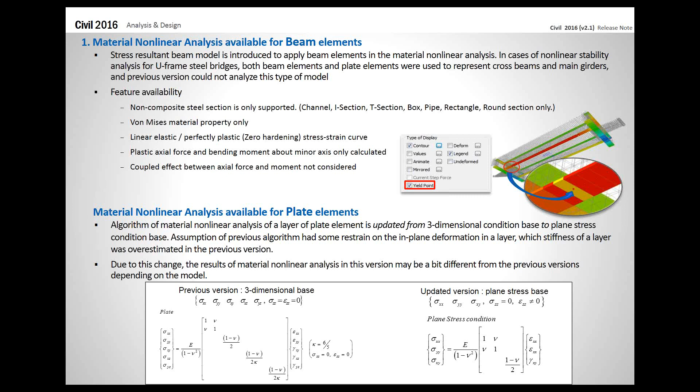Second update is improvement on moving load analysis. In general, analysis performance can be manually managed by adjusting the multiprocessor under analysis options. However, previously it did not affect the moving load analysis. Starting from this version of Midas Civil, multi-threading analysis, which increases the number of multiprocessors, will affect the moving load analysis results and performance.

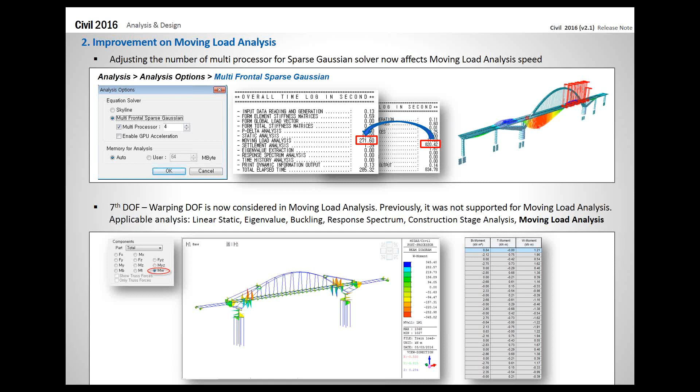Continuing with the moving load analysis improvement, Eurocode and United Kingdom code traffic lane optimization is now available at user-defined lane width.

For those users who are not familiar with the traffic lane optimization feature, it is an option that allows the program to allocate the vehicle load not at the center, but also at each end of the defined moving lane, to consider more loading cases in determining the worst case loading scenario.

You can check the effect of the lane optimization feature by checking the moving load tracer, which will show the shifted location of the vehicle.

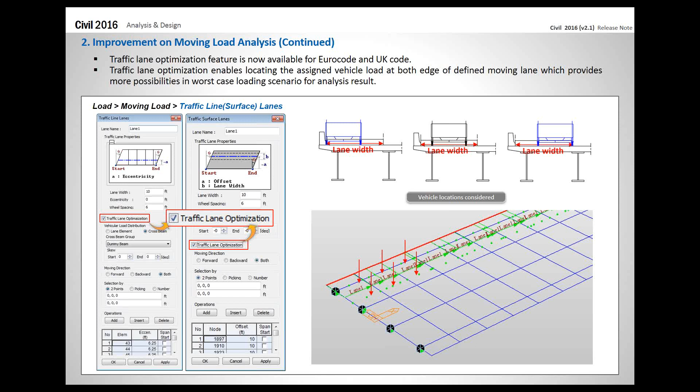Third is triple friction pendulum isolator. With development requests from various users dealing with heavy seismic load projects, triple friction pendulum isolator boundary condition is newly implemented to our software. It is proven that TFPI is both structurally and economically efficient than the general bearings.

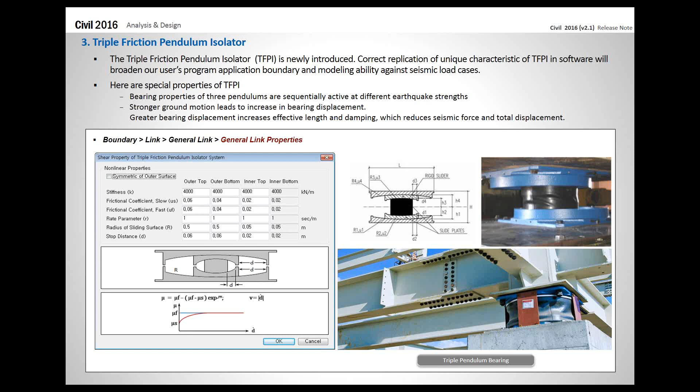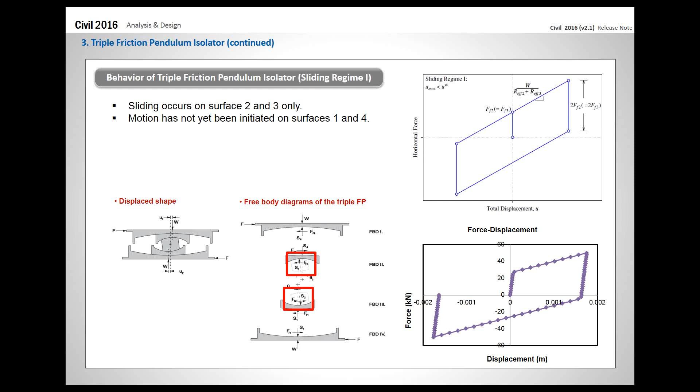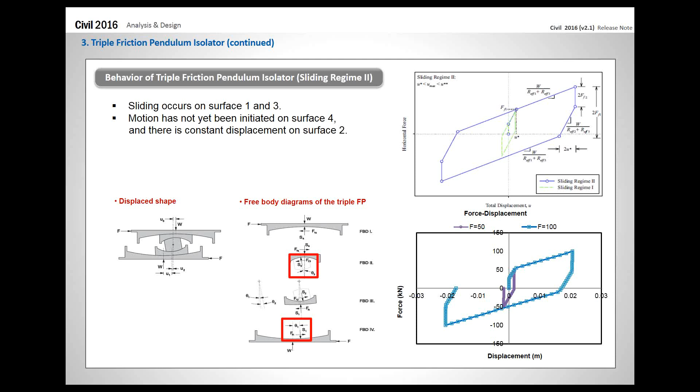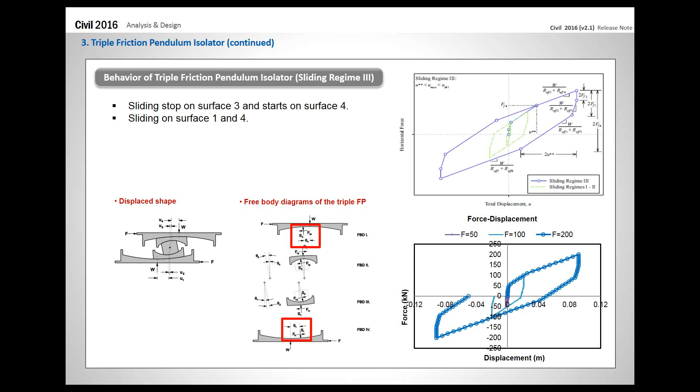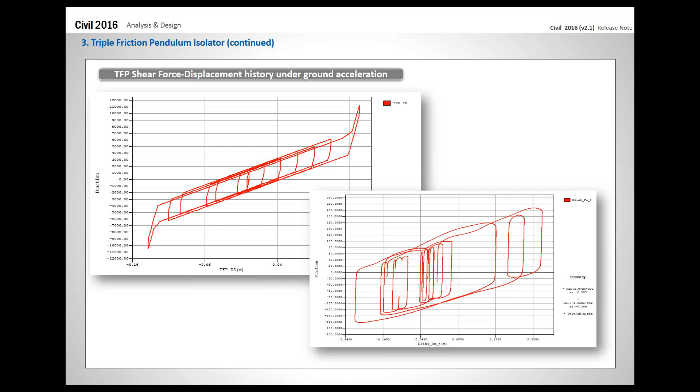After I go through the PDFs, I'll briefly go over the triple friction pendulum isolator within the program. This is the time history force displacement graph that you can get from our software. More detailed example model files are provided on our website. After I finish this webinar, once I upload them, you can click on the download link and go directly to the example files to test it on your own.

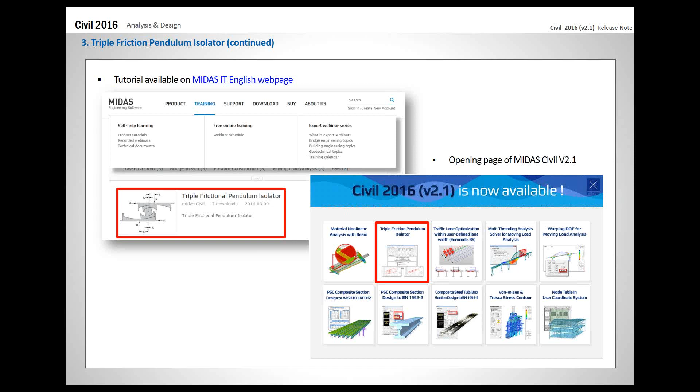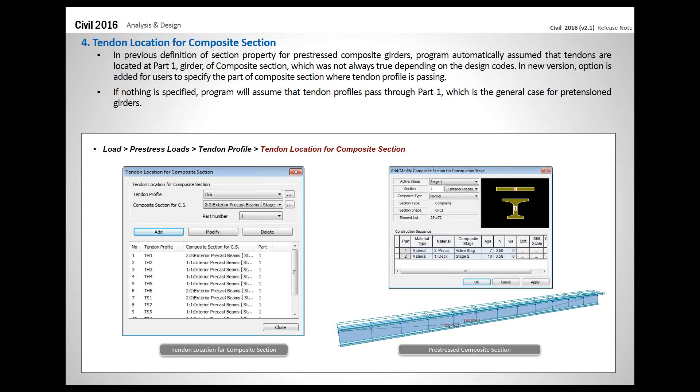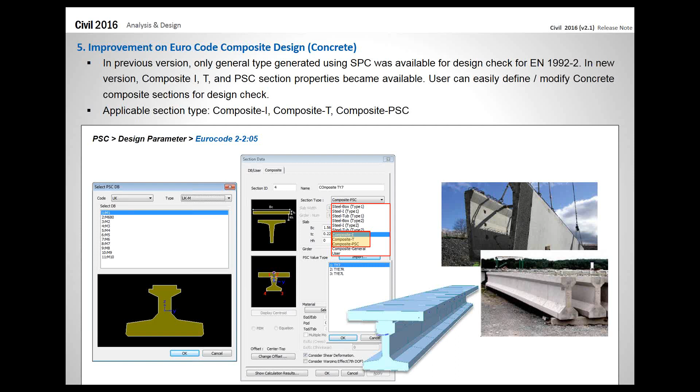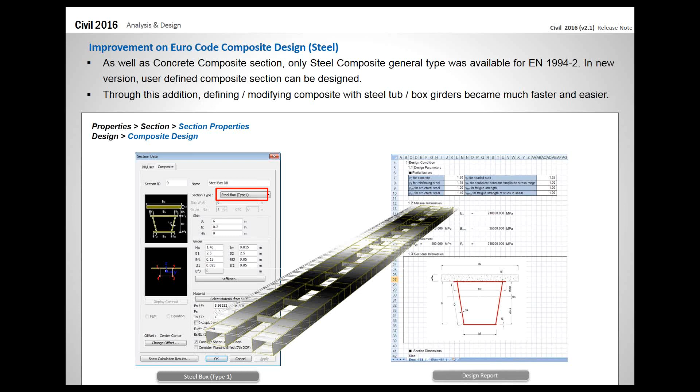Yeah, not only PSC composite bridge, but also steel composite bridge.

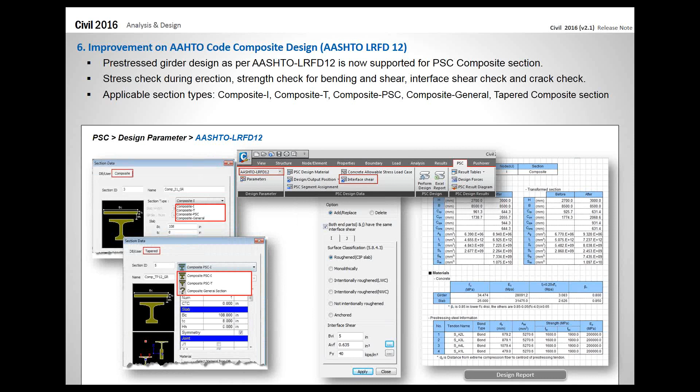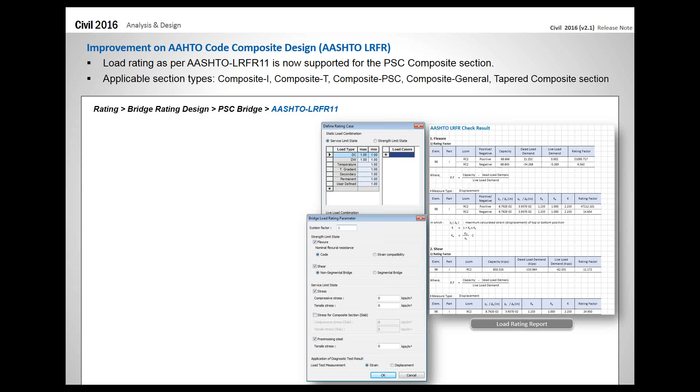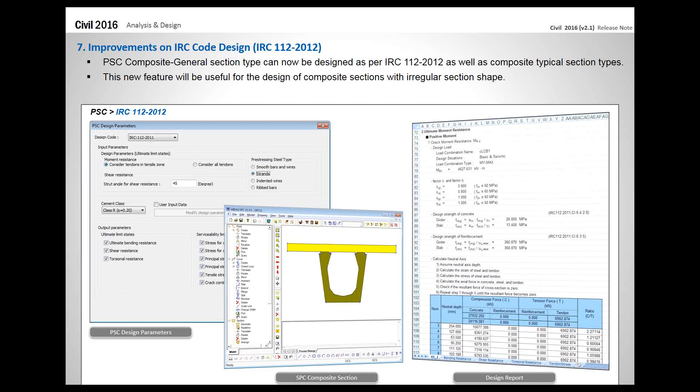One additional thing for IRC code, this time 112-2011, the reinforced concrete structure design check is available.

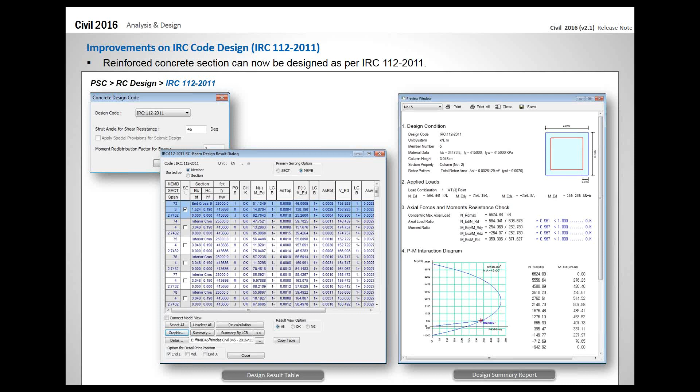Well, I thought I went through the design check and load rating information too quickly, so I made a brief table just summarizing what was added through this newly released version of Midas Civil.

So for design check, Eurocode 1992 PSC composite design check is available. 1994 steel composite box and tub section is available. For AASHTO LRFD 2012, PSC composite design check is available. And for load rating, AASHTO LRFR 2011 PSC composite section is available.

As it goes on, design check for PSC composite section general for India code is available, and reinforced concrete structure design check for India code is available.

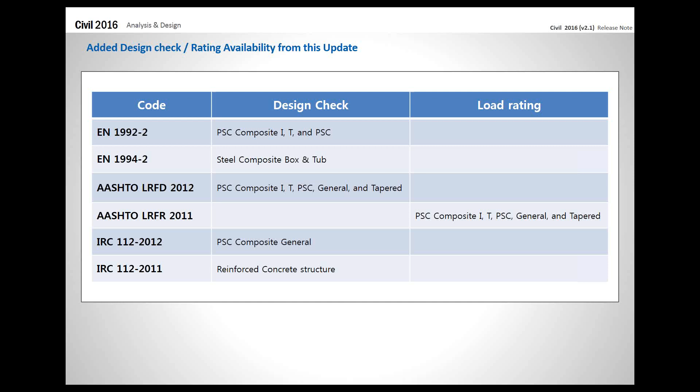Now I would like to jump to the second portion of the webinar, the release webinar, which is pre- and post-processing updates.

Previously, the nodal coordinate system or nodal coordinate table was always giving coordinates in respect to the global coordinate system, even when a user defined a user coordinate system. Now it's fixed, and the nodal coordinates will be adjusted if the user defines a user coordinate system. This will be very useful for flared sections, skewed bridges, sections that start at an angle, or inclined foundations.

After I go through all the slides, I'll go to the program and show how it's being changed within the program. Also, the nodal coordinates based on user coordinate system table can be imported to dynamic report generator too.

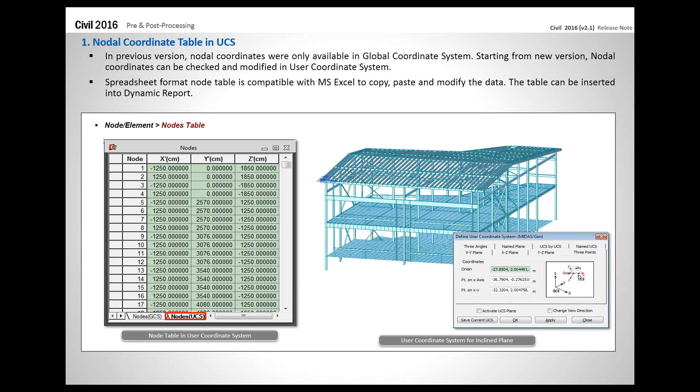Second is improvement on plate local axis aligning for result check. Aligning plate local axis for result was already available, however there was an internal error with the definition which did not allow users to modify the aligned axis once it is defined. That is fixed. Now users can either add, replace, or delete the aligned plate local axis. I'll also demonstrate this after the PDF.

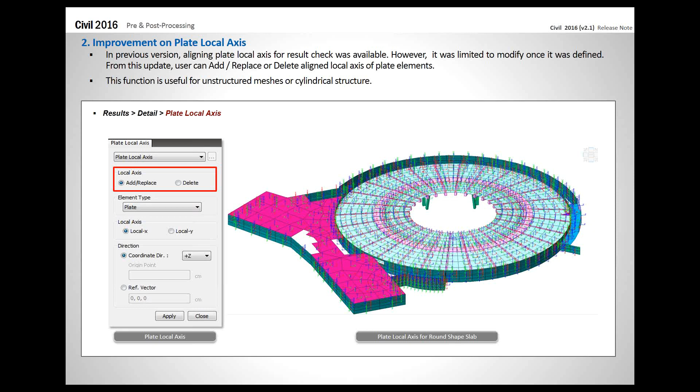New section and material database for cold form steel. New section and material properties are added for the UNI Italian standard and SS Singaporean standard. Cold form channel, pipe, box, and upright sections are added. For ICHA, the Chilean standard, angle, double angle, star battened angle, I-shape channel, double channel, and lipped channel section properties are added. Cold form material properties such as EN 10326 and EN 10149-2, and so on, are added to the program.

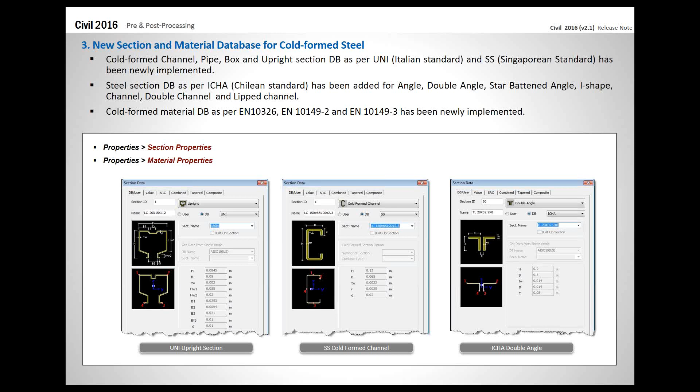The warping DOF was added in Midas Civil version 1.1. It was a major update, but it had some internal errors, and I believe many of our users went through a hard time when version 1.1 came out. The major cause of the error was when a longitudinal stiffener was added, which is supposed to be hollow.

In order to consider the warping DOF, the program took a new approach of calculating section property by generating an internal mesh within the section. But there was an error causing a lot of trouble. These figures show common reported errors when it was first published. The longitudinal stiffener is supposed to be hollow, but it was generating mesh within the stiffener. Same on the right, and for box composite sections which should be hollow, it was generating internal mesh.

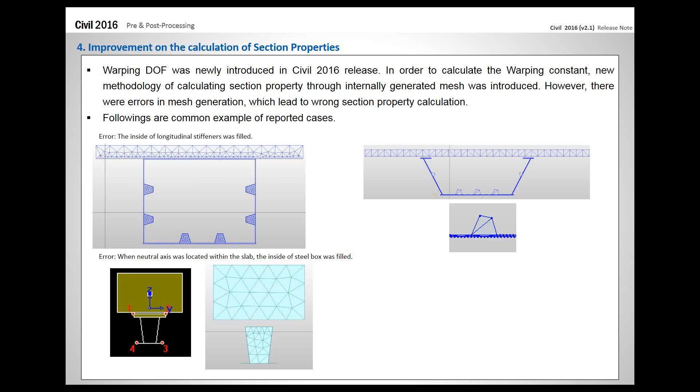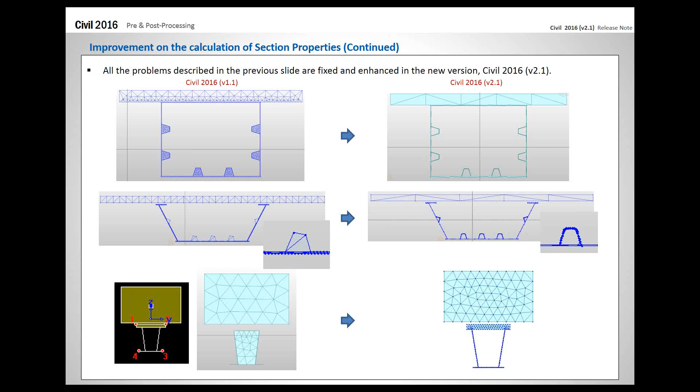Not only did we resolve the errors, we even improved our section property calculation. Before, some sections that successfully generated mesh had mesh size and distribution that was not very uniform. Updating from version 1.1 to 2.1, we redistributed the mesh more evenly, so the shear area of the section property will be calculated more realistically and accurately. Comparing to the left figure, it's more even and not focused on one part of the section. The bottom one shows the internal mesh is more refined for better calculation.

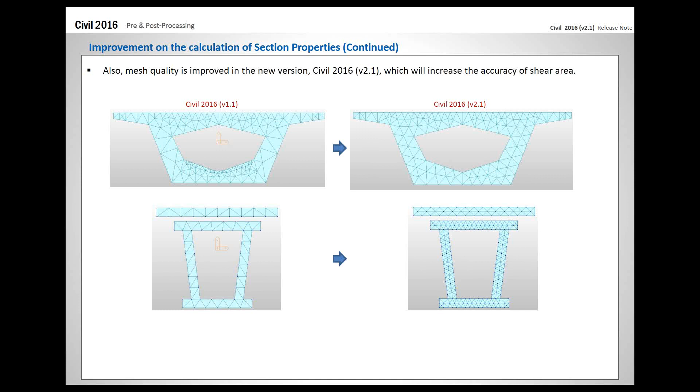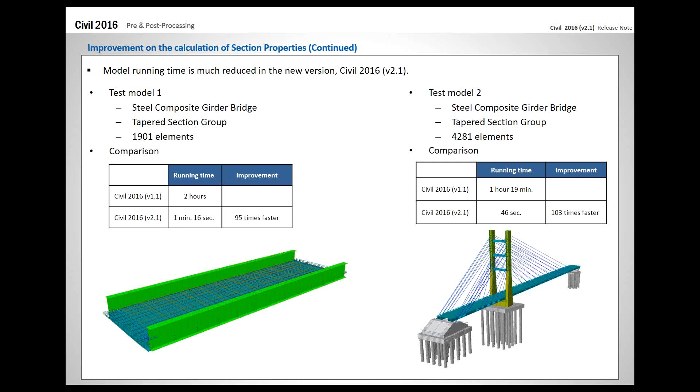Even if we updated or changed the way of calculating the section property, some things are still consistent. There is no change in calculating the torsional constant of composite steel I or composite I sections. That specific equation is being used in the field too, so we maintain that equation.

Since the new approach for section property calculation was added, there are a couple things users need to be aware of. First, section properties can be different between what you got from the previous version and this version of the software, because the new approach gives better calculation for section properties.

Second, section properties calculated from previous versions will not be automatically updated, even if you just open up the model file in the new version of Midas Civil. In order to update them, go to section properties and either open the section property and click OK, or click show calculation results for section properties. That will automatically update the section property of the defined section.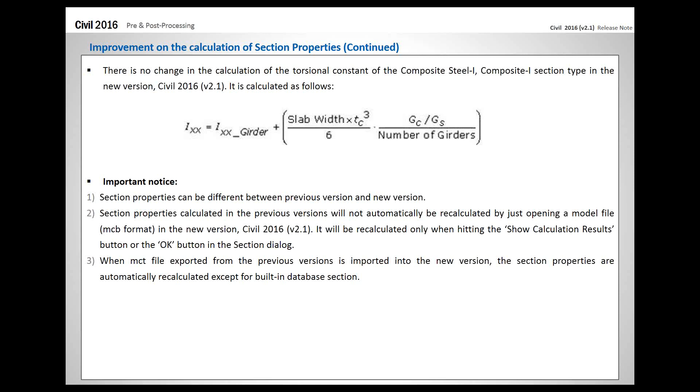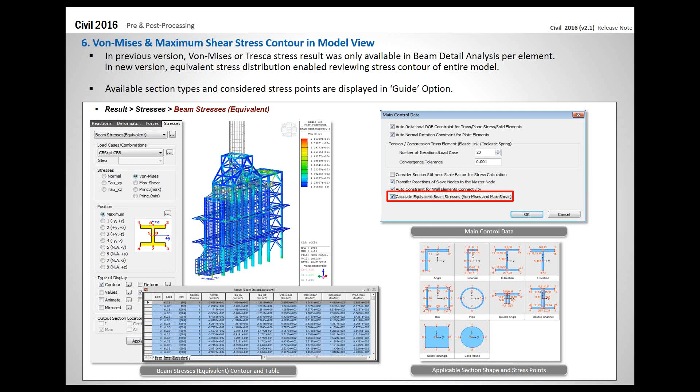Now I'll shift to our software and demonstrate a couple things, because most of the major updates were more theoretical or related to design checks, and I did not have time to show all of that. So I planned to go through the nodal coordinate system, the plate local axis update, section properties and material properties added to the software, and the triple friction pendulum isolator feature.

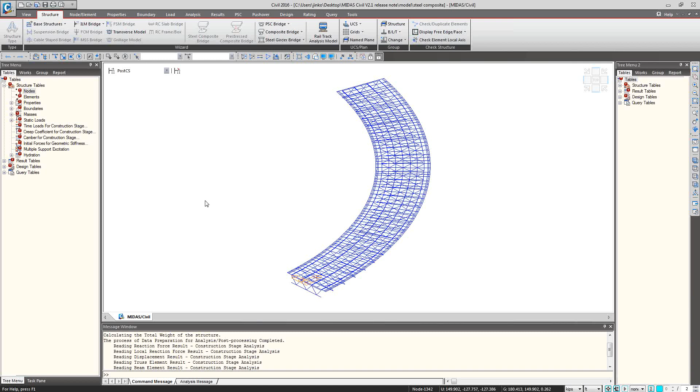So this is an example file that I created for this specific webinar. As you can see, the coordinate system or axis right now is the global axis. If we go to the node table, it will show the nodal coordinates based on the global coordinate system. Even if you go onto the user coordinate system, it will show the same.

But when we go to UCS, you can define whichever way you would like. I'll just use the UCS and rotate the coordinate system in the z-axis by 45 degrees. So you can see that the coordinate system is rotating now in the z-axis, and go to the nodal table again. You can see that the global coordinate system did not change, but if you go to user coordinate system, now it's giving the coordinates. You can also copy these coordinates into an Excel file and make a modification.

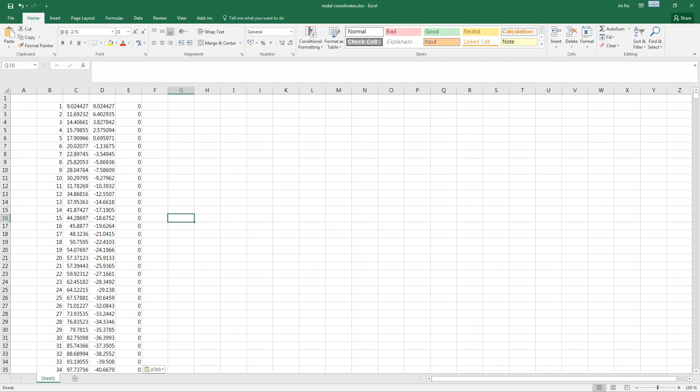Now I would like to cover the section properties and material properties that were newly added to the program. So go to properties, and first let's check the material properties. So these three cold form steel material properties are added: EN 10326, and 10149-2 and -3.

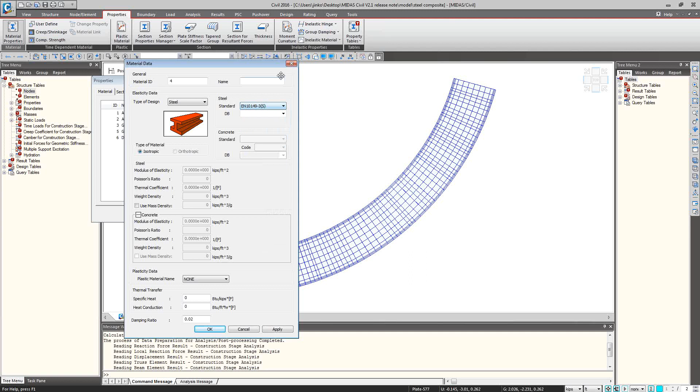Now let's go to section properties. As I said, from UNI, which is the Italian standard, cold form channel, upright, and other section properties are added, and also for ICHA, which is the Chilean standard.

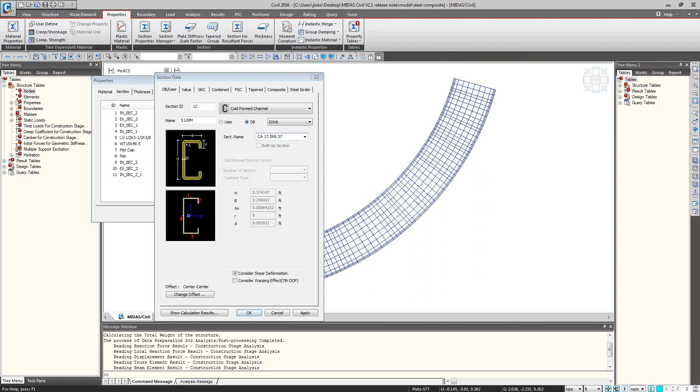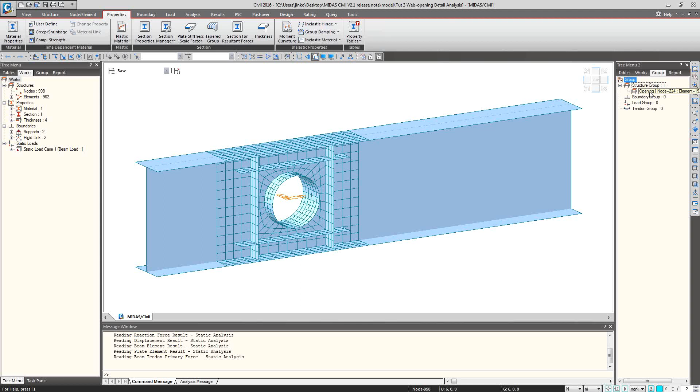Now I'll jump to the plate local axis, which is used for result review. This is the example model file already included in your C drive under the Midas folder, from tutorial 3. Prerequisitely, I defined a structure group for this round section. So if we check the element local axis, you can see that the local x direction is towards the surface of the tube section.

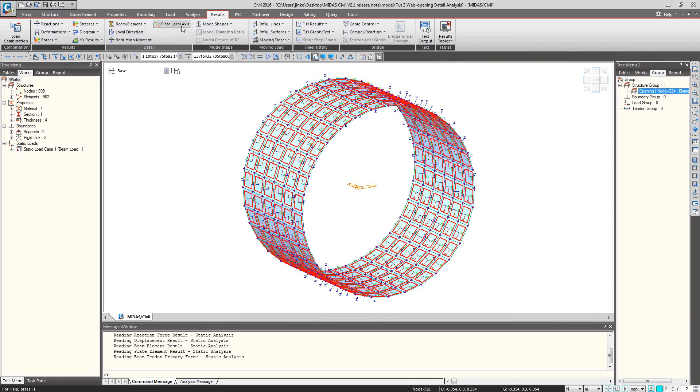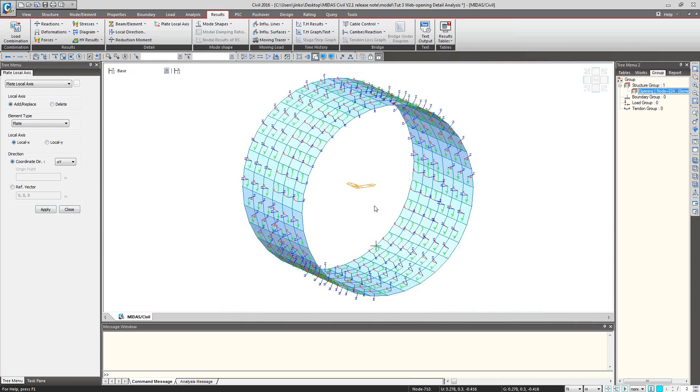But if we go to results, plate local axis, and select local axis x, local x in direction of global y, you can see that all the plate local axes are now aligned to one direction. This feature is very useful when checking stress contour or force diagram on plate elements that are not aligned, or hard to find uniformity within the elements.

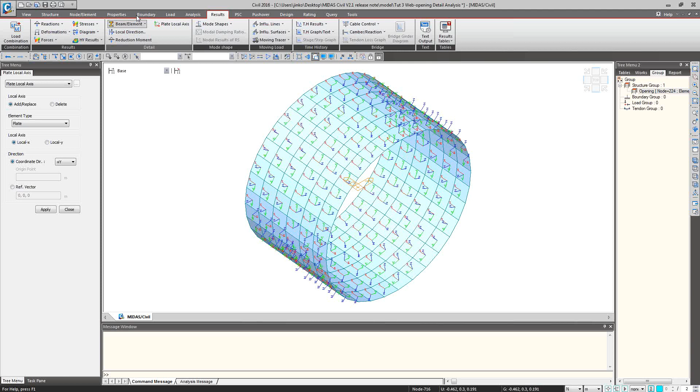For example, like these elements where the local axes are pointing away from each other, you can align them and then check the resultant stress or force.

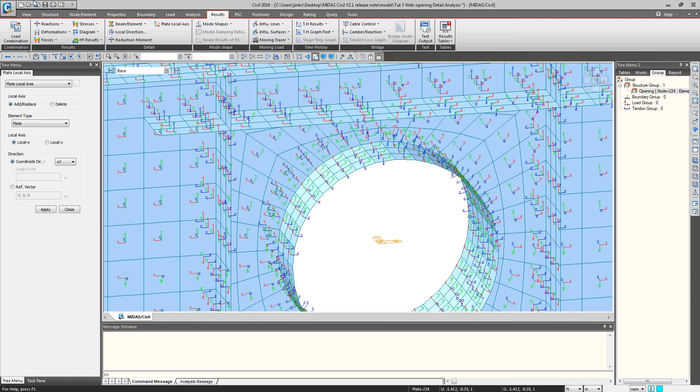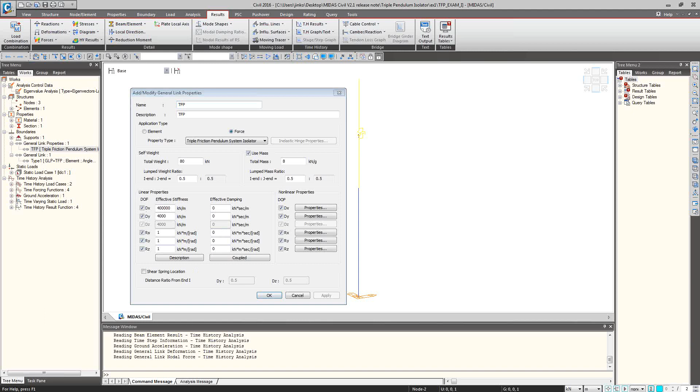Now I'll jump to the triple friction pendulum example model. This is a very simple example model for the triple friction pendulum system. I'll just open up the input window really quick. If you are not aware of what each of the stiffness parameters refer to, it shares the same input definition as the friction pendulum system isolator from our online help manual. So please go to our online help manual and type them accordingly.

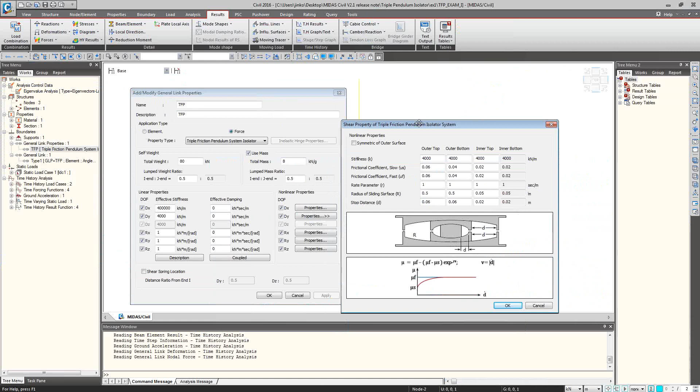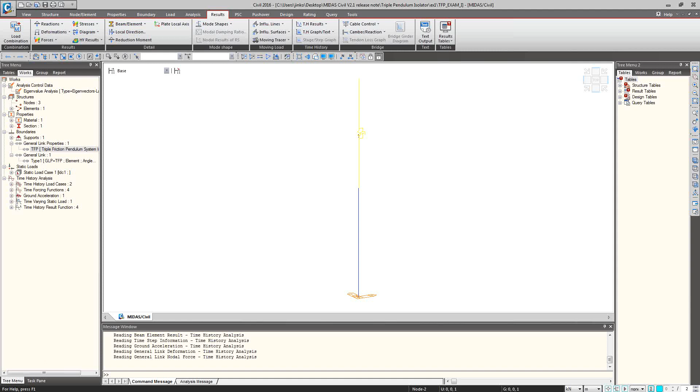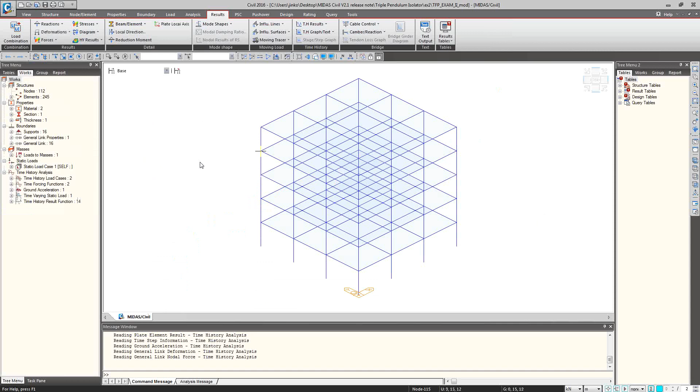There is one more model file which is a little bit more complicated. I would like to share that result graph and then finish the webinar. So the triple friction pendulum isolators are located at the bottom, the foundation of the structure, and the performance has already been run. Let me just retrieve the force and displacement graph.

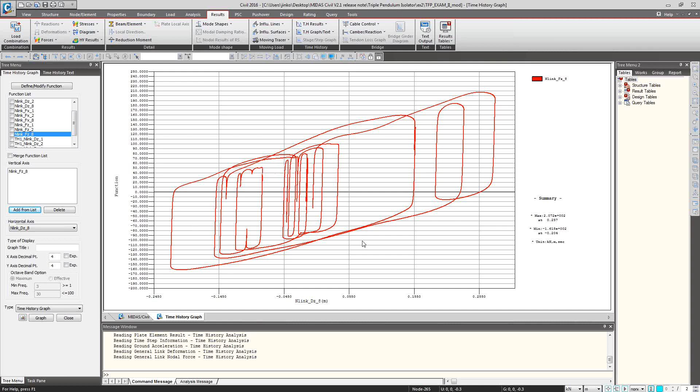Oh, I think I muted myself for the last couple of seconds. Let me just go back to the program. So this is the result, the force and displacement graph for a little bit more complicated structure.

Please let me go back to the simple structure and just go through what's being covered one more time. Go to results.

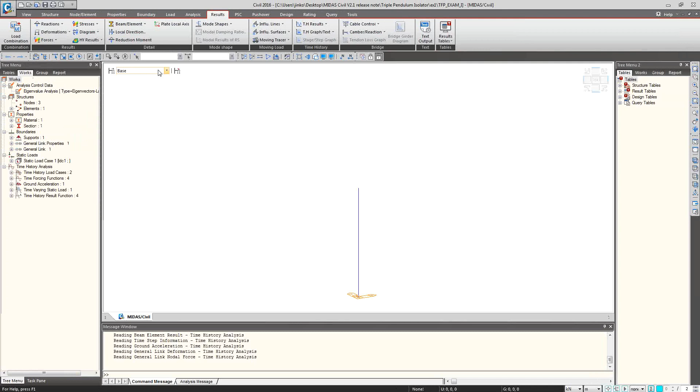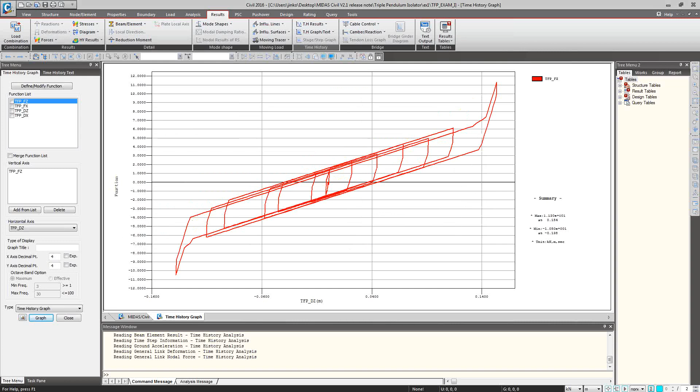Now I'll go back to my slides and wrap up the release webinar for Midas Civil 2016 version 2.1.